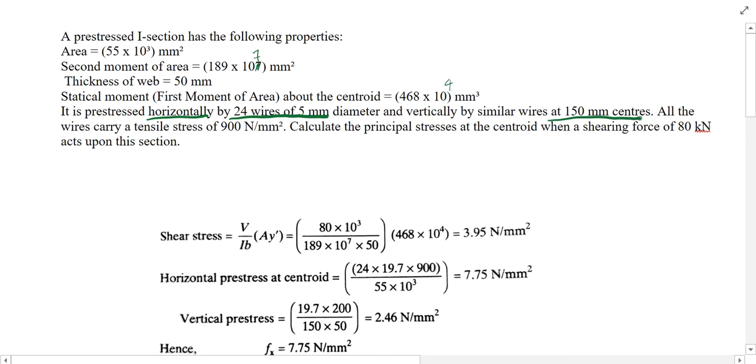It is given it is pre-stressed by 24 wires of 5 mm diameter horizontally and vertically by similar wires at 150 mm center to center. All the wires carry a tensile stress of 900 Newton per mm square. Calculate the principal stresses at the centroid when a shearing force of 80 kilonewton acts upon this section.

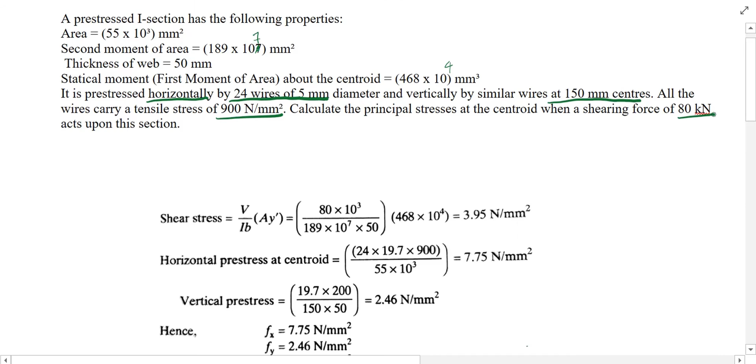First you need to find the shear stress, that is V by IB into Q, where Q is equal to A Y bar. You'll get the shear stress value as 3.95.

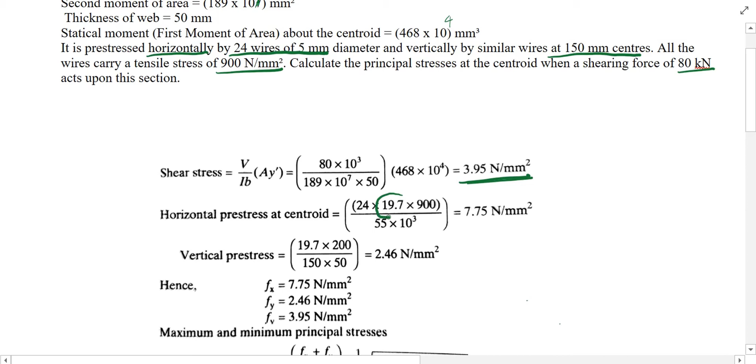Now the horizontal pre-stressing force, that you also know how to find. There are 24 wires having 5 mm diameter. The area of a 5 mm diameter bar is 19.7, into the tensile stress of 900, divided by the total area of the cross section.

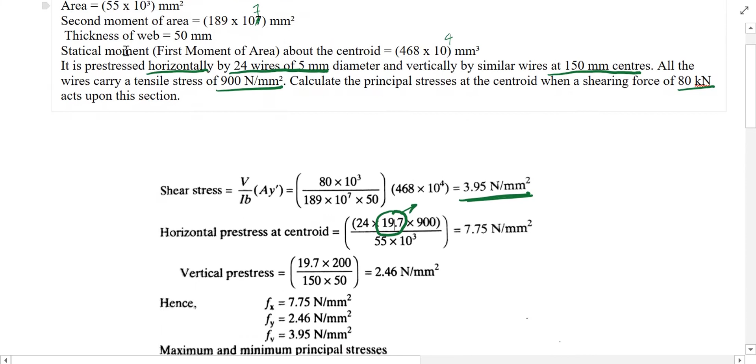Now coming to vertical pre-stressing, that was the doubt created there. The vertical pre-stressing, this is 900, that is area of 1 bar into stress divided by area.

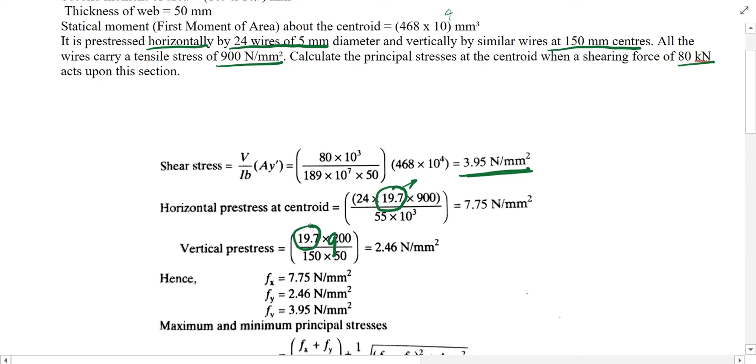Here you can see the vertical pre-stressing is actually like this. So if I take a section, we will have the section in this form, and the vertical pre-stressing will be provided at the top and at the bottom like this.

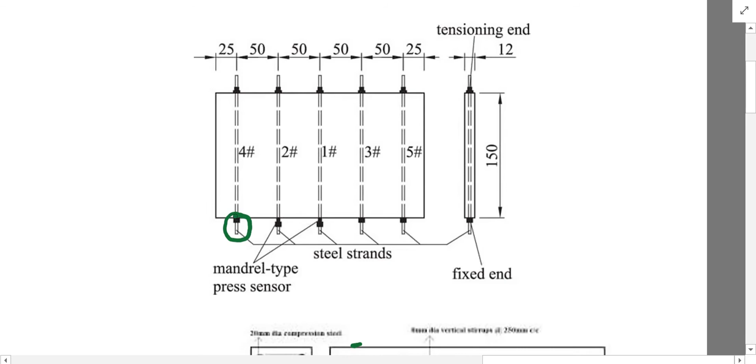You can see here at one point we will anchor it and we will apply the force from the other point. So if I'm taking the cross section like this, and I am looking from the top and taking the cross section like this.

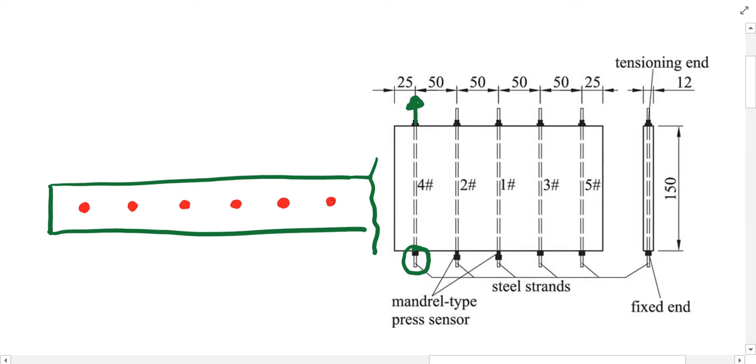You have the anchoring or the tendons like this being anchored from the top. If I am taking, I have it like this, and at the bottom, if I look from the elevation point, I can see here the section is like this.

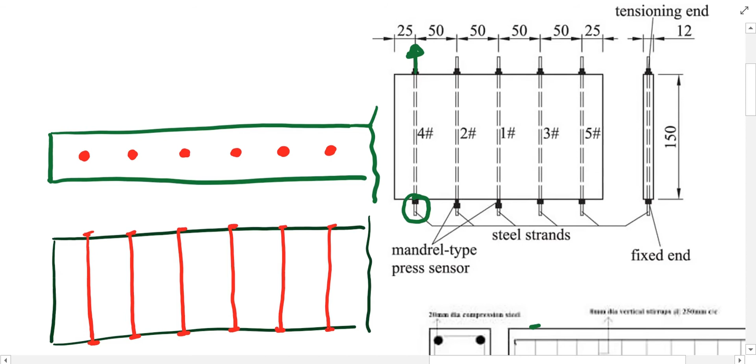There will be the anchorage provided at the beginning itself. I told you it's highly uneconomical, because in order to provide this much amount of anchoring devices, it's not that much practical.

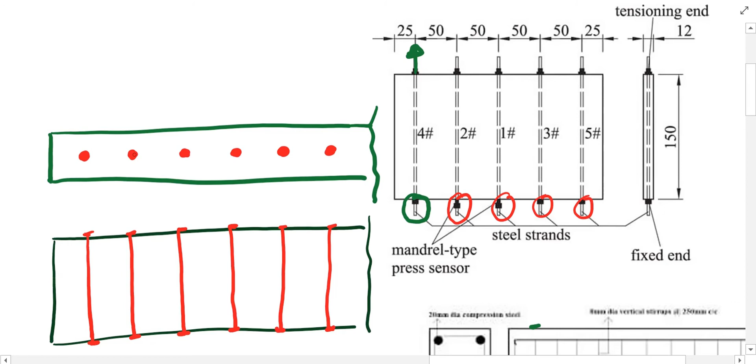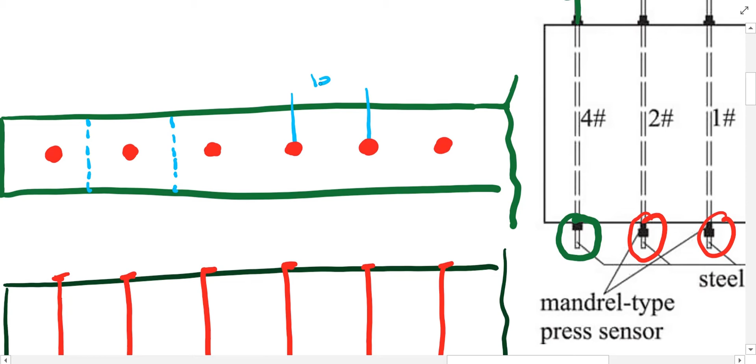As you can see here, if I'm taking this particular tendon, it is having influence up to this point, right? It is having influence from here, center of this section to center of this section, and it is given the center to center distance between this is 150 mm.

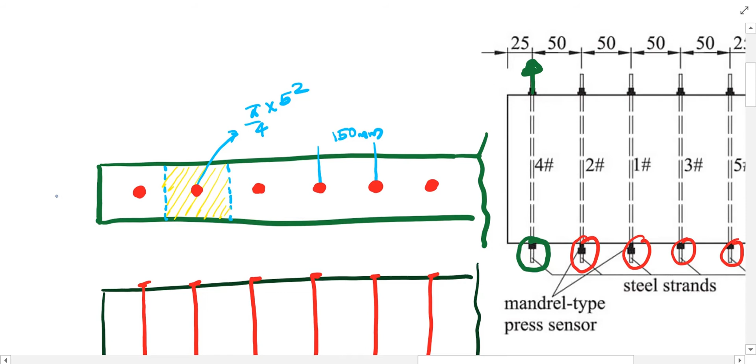So this particular tendon will be having an area equivalent to pi by 4 into 5 square, having an influence to this much area, which is nothing but 50 by 150 - this is given as the web thickness is given as 50 mm. Isn't it? Have you understood?

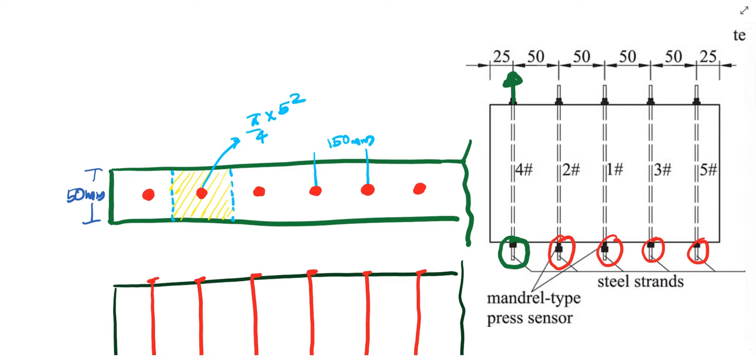Have you understood that? Yes, sir.

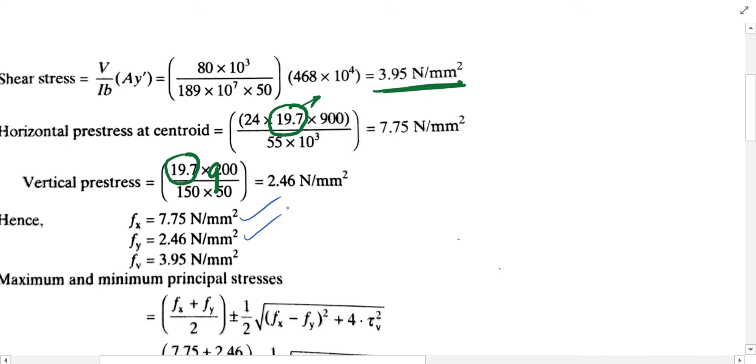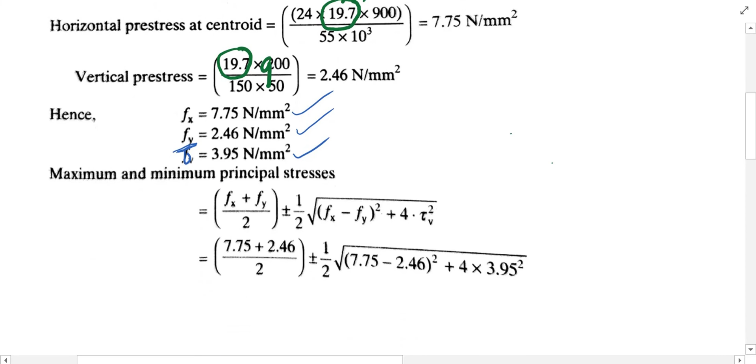There you will get the value for your Fx, that is your horizontal pre-stressing force, Fy, that is your vertical pre-stressing force, and tau V, that is your shear stress. Computing that, you will get the maximum and minimum principal stresses. This value Fx and Fy and tau V, if you substitute, you will get the value.

For Fx and Fy as 5.1 plus or minus 4.7 Newton per mm square. So which means both are compressive in nature.

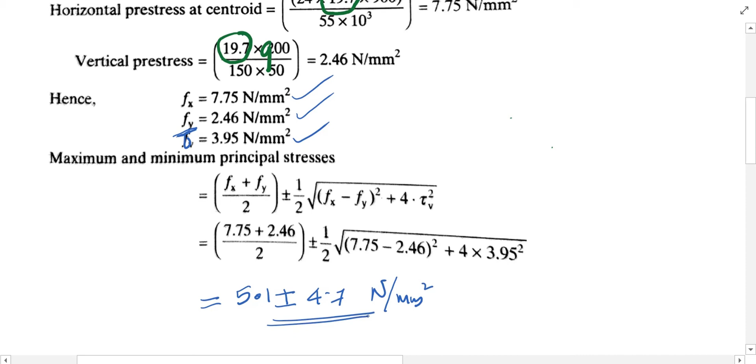So is it okay? Is it okay? Asif, understood? Yes, sir.

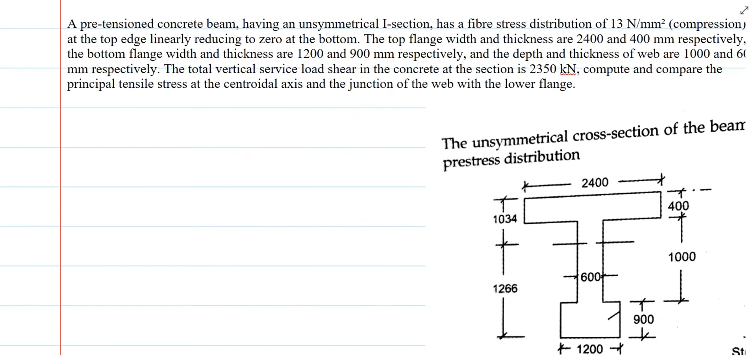Now similarly, there was another question given. Have you tried this? The only thing you need to see is it is given a pretension concrete beam having an unsymmetrical I section, has a fiber stress distribution of 13 Newton per mm square compression at the top edge, linearly varying to reducing to 0 at the bottom. It's linearly varying.

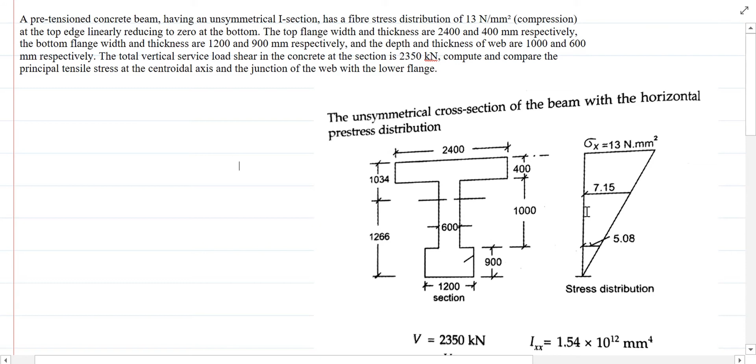So at any point you could find out by interpolation. And they had found out the value. You can see here, by interpolation, they had found out at these 2 points. I'll tell you why these points.

The top flange width and thickness are 2400 and 400 mm respectively. The bottom flange width and thickness are 1200 and 900 mm given here. And the depth and thickness of the web are 1000 and 600 mm. That is the section properties are given.

Also, in the question itself, it is given the centroid from the top and from the bottom fibers. The total vertical service load shear in the concrete at the section is 2350, that is, the total shear force acting at the section considered is 2350.

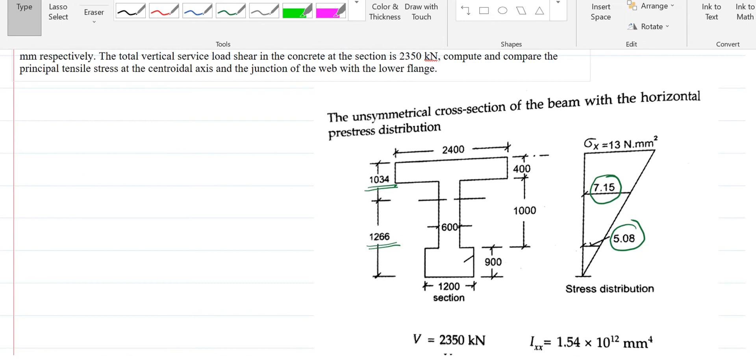Compute and compare the principal tensile stress at the centroidal axis and junction of the web with the lower flange. So you are asked to find the principal tensile stress in the section at this position, as well as here. You are asked to find at these 2 points.

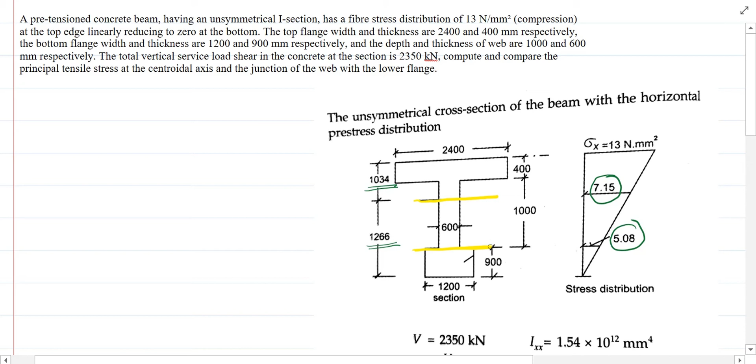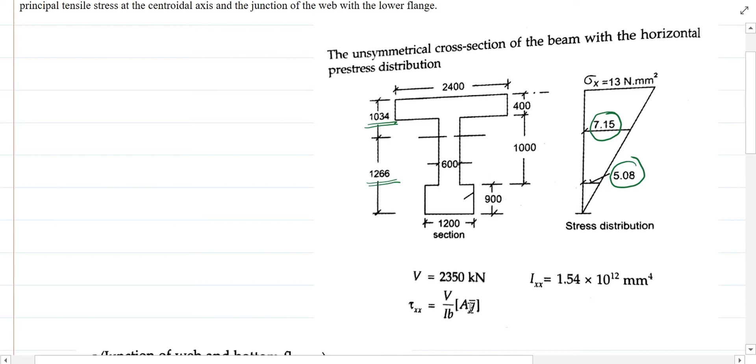So what we need to do here, the only change is you need to find the value for the shear stress at these 2 points. You have the equation for shear stress as tau xx at any point is equal to V by IB into A y bar. I'll just do it for your top section.

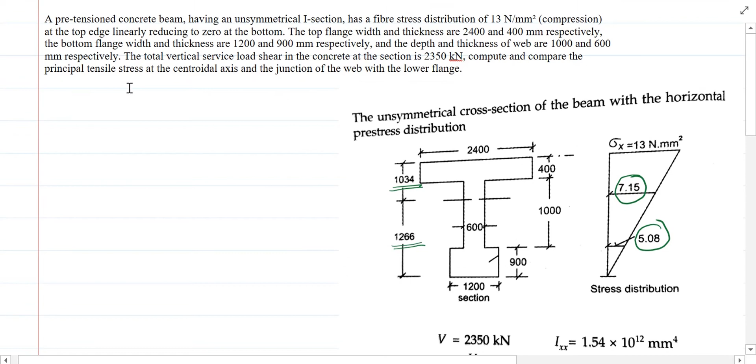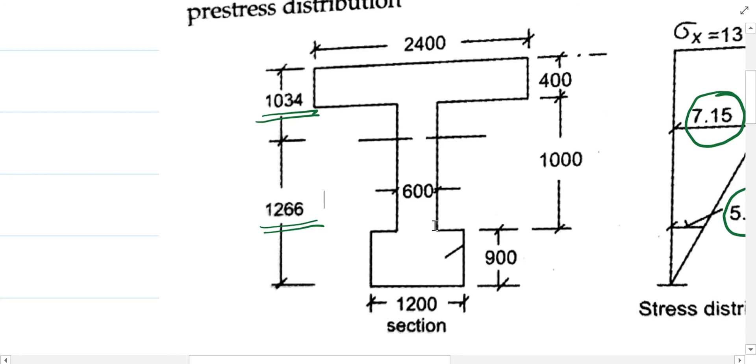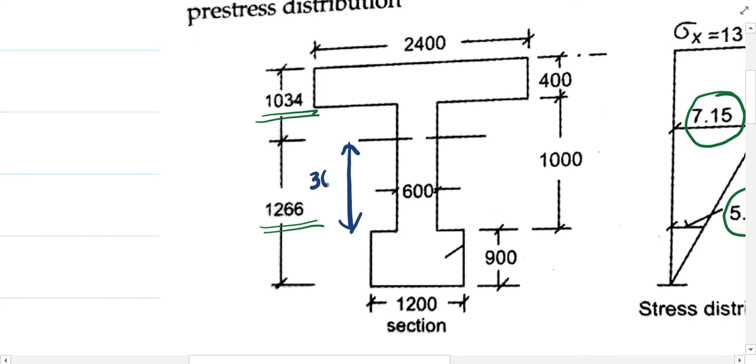You need to find the principal tensile stress at the centroidal axis. Centroidal axis means here. So I know this total distance is 1266, and this distance is 900, which means this distance I will get as 1266 minus 900, that is your 366 mm.

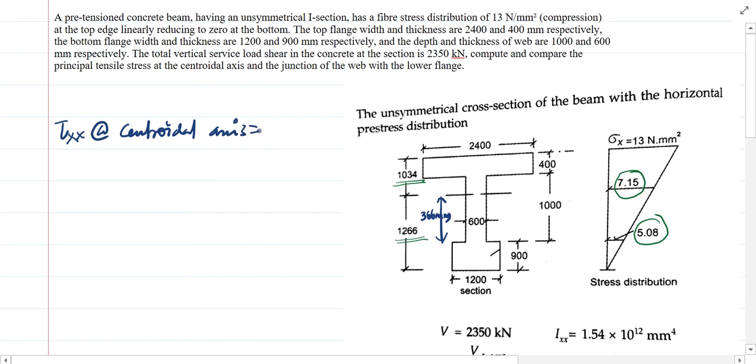Now you need to find the value for tau xx at the centroidal axis. You have the equation V by IB into A y bar. So area means what? The area which is towards the bottom, that is this area you need to consider. This is the total area you need to consider from the centroidal axis.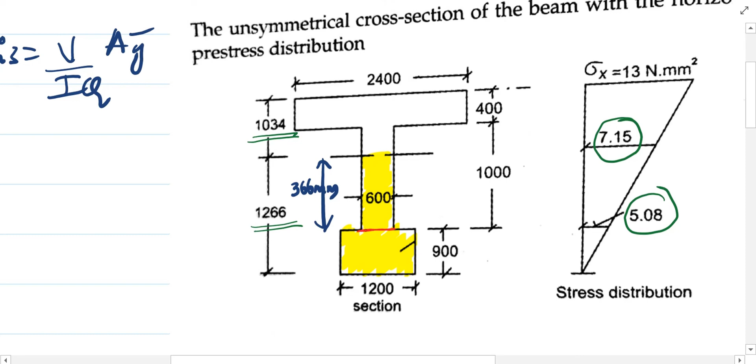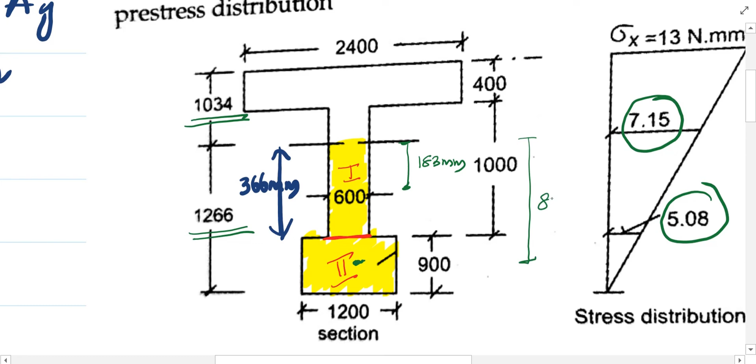So what I will do is divide this section into 2: this is 1 and this is 2. The centroid of this point from the top, I can write it as 366 divided by 2, and I'll get it as 183 mm. And the centroid of this from the centroidal axis, that is 366 plus 900 divided by 2, that is 450. You'll get this distance as 816 mm.

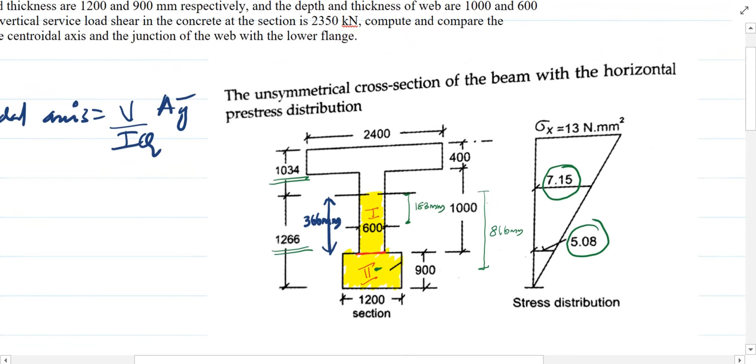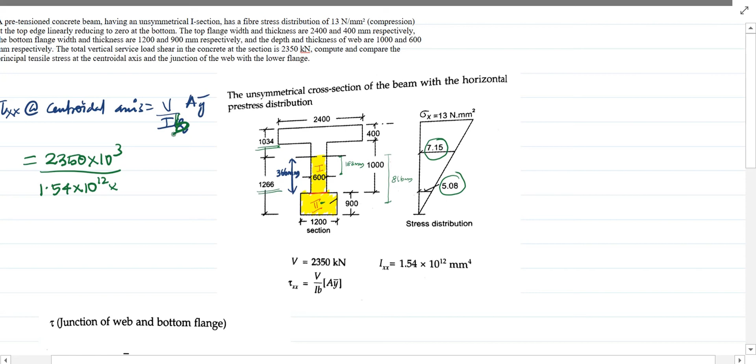Now I need to find the value for tau, shear stress at the centroidal axis. V is given as 2350. So this is 2350 into 10 raised to 3, divided by I, which is given as 1.54 into 10 raised to 12, into B. So B is the width of the section considered. Here we are considering at the centroidal axis.

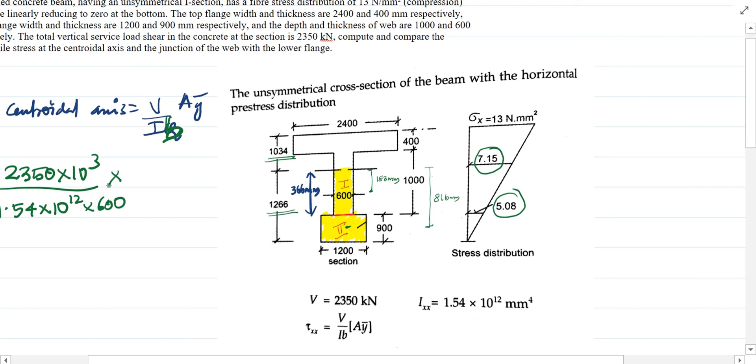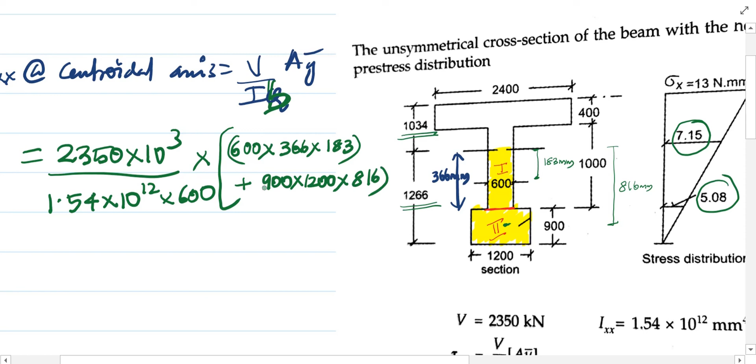So the width of the section here considered is 600 into A. I told you I'll divide this into 2 sections, 1 and 2. So for the first section, A is 600 into 366, into y bar for the first one, which is 183, plus for the second section, 900 into 1200 into the distance from the centroidal axis to the center of gravity, that is 816. So I'll get the value for this as 2.34 Newton per mm square.

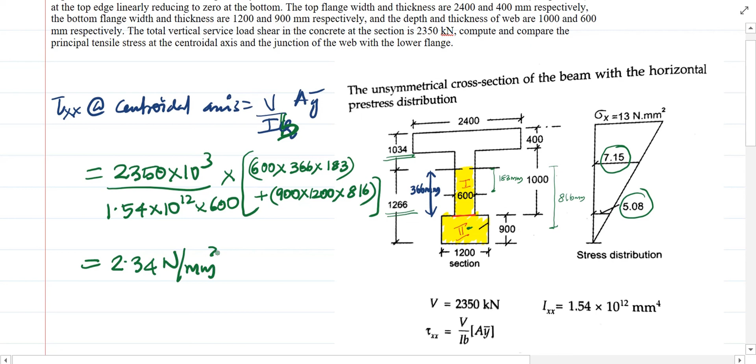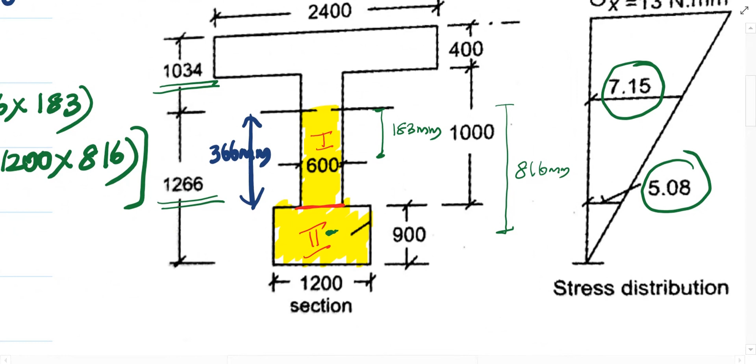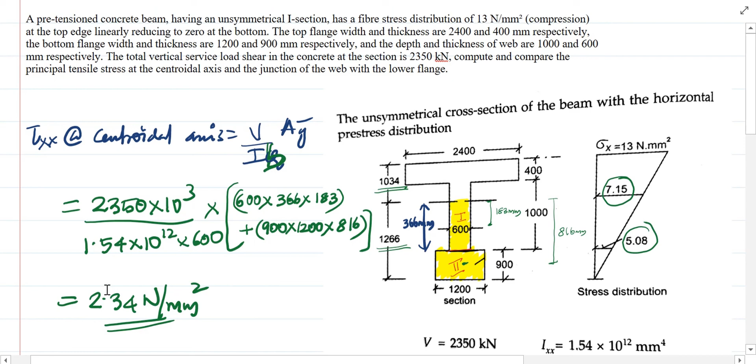Newton per mm square. So this is the shear stress at the centroidal axis. Similarly, you need to find the shear stress at the second point, at this junction, as given here. Compute and compare the principal tensile stress at the centroidal axis that we had found, and at the junction of the web with the lower flange. So this is the junction of the web with the lower flange, so that also we'll find out.

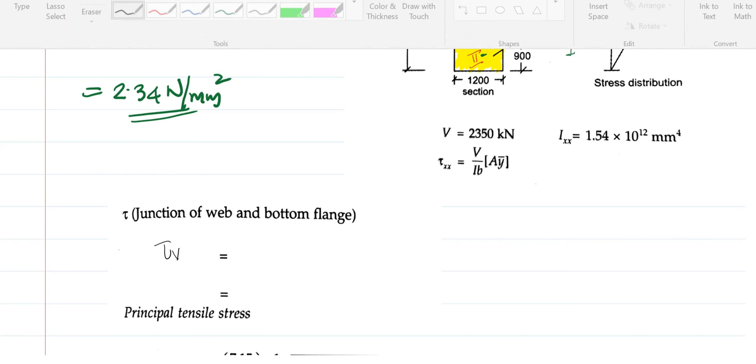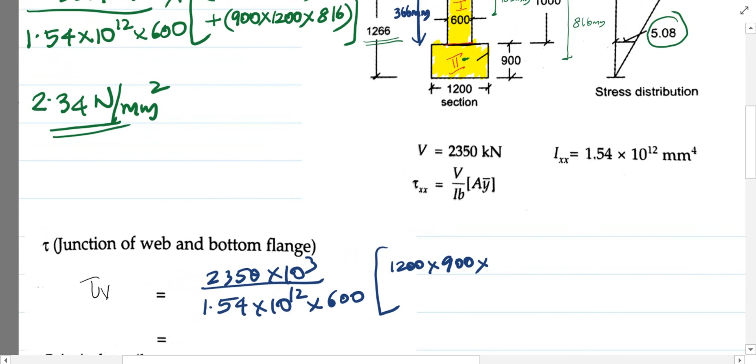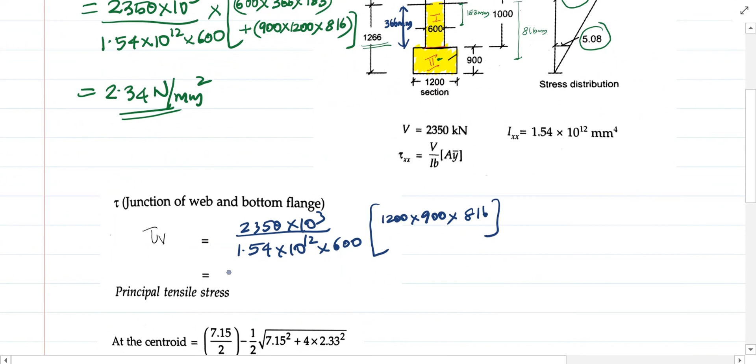You have tau v is equal to, the V is same, that is 2350 into 10 raised to 3, divided by I, also same, 1.54 into 10 raised to 12, into, at that section also the width is same. We'll take the lower width only, that is 600 mm. At the junction, into the area of the second portion, that is 1200 into 900, into distance from the centroidal axis, that is 816 mm. Solving this, I'll get the value as 2.23 Newton per mm square.

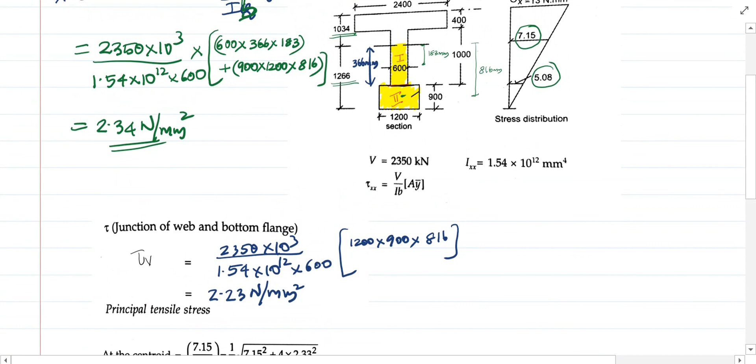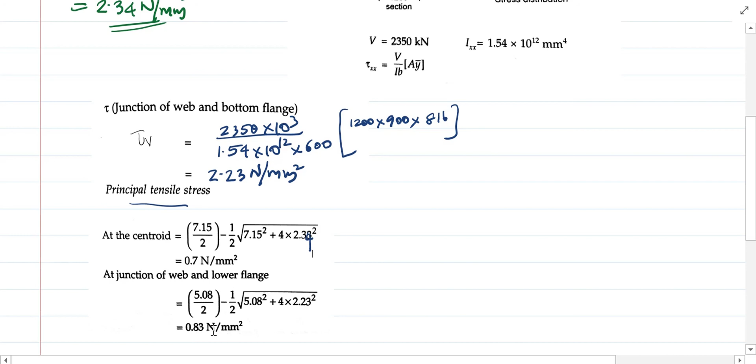So now you have found the value for shear stress at the centroidal axis, as well as at the junction between the web. From there you can find the principal stress. You will find the principal stress at the centroidal axis is 2.34, giving you a value of 0.7, and at the junction between the lower flange and the web, you will get it as 0.83. So that is being asked in the question. So is it okay?